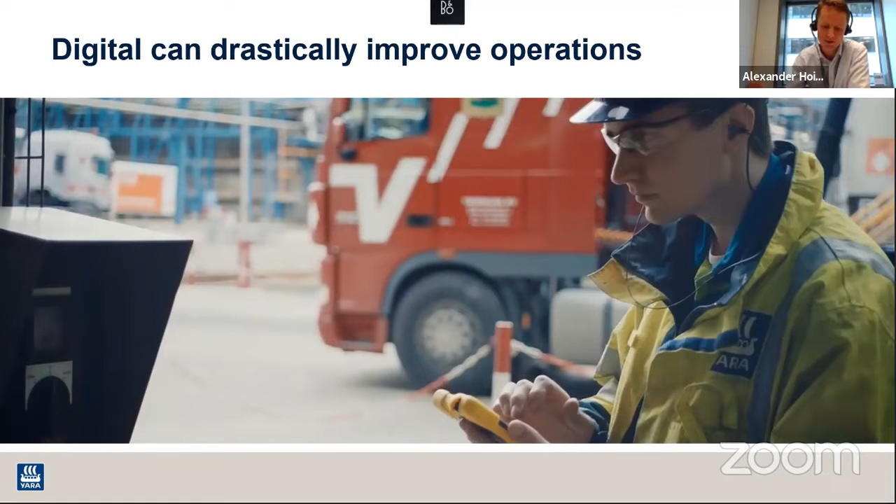So as any other major manufacturer, we are constantly chasing improvement opportunities. As a company, we've been on a lean journey now for some time. And as I mentioned at the very beginning, we really see digital as the next natural step on that improvement journey, where we see an opportunity for another drastic step change. If you saw that guy on the previous slide holding a tablet, it's not that hard to use a bit of imagination and see that there is a real improvement opportunity here.

From equipping our field operators with tablets versus the pen and paper that many of them still use today, also at our production sites. But when I say that there is a real and significant improvement opportunity, what does that really mean? For us in Yara, we see that there is at least $500 million up for the taking here in terms of value creation on an annual basis.

But the value in terms of the financials is only part of it. We also believe, as we will get back to, that there are significant improvement opportunities in our HESQ performance that we can realize through digital tools and applications. And not only that, there are also some softer benefits which maybe are not as explicit, but being seen as an attractive employer in the world of today also means that we need to invest in making sure that we equip our employees with the right tools and solutions.

So if we look at that opportunity, we think that it's simply too big to ignore. And frankly speaking, we believe that we have to go after that opportunity if we want to stay competitive. And as a basis of that, we have established a clear vision as a company.

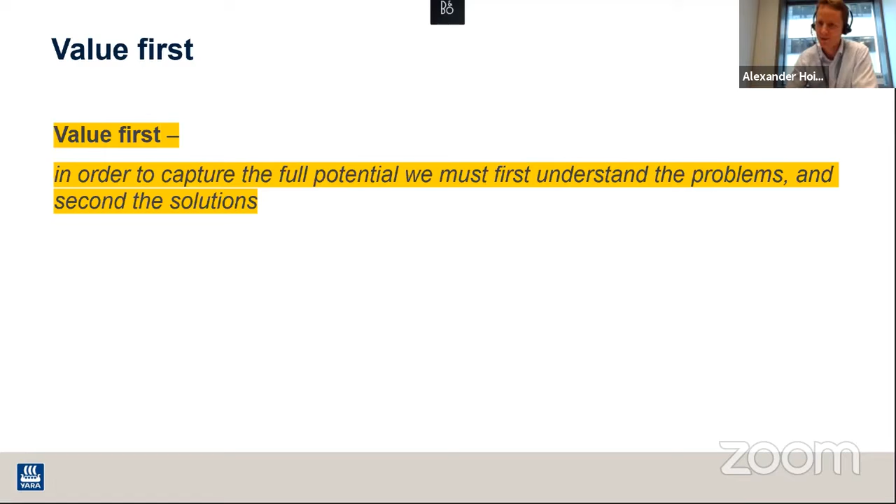I'll hand over now to Aurélien, there are plenty of opportunities to do this, plenty of real problems to go after. I will hand over to Aurélien, who will give us some concrete examples from the Yara Tertre perspective. So Aurélien, I'll hand over the word to you.

Thank you, Alexander. So the main goal here is to present a brief overview of different digital application examples developed at the Yara Tertre site in Belgium. The journey actually started back in 2014, with the support of the digital production department or by direct site initiative. I will try to share how these 4.0 digital initiatives align with our corporate process safety risk management overview and overall productivity maintenance governance ambitions.

But first, a few words about the Yara Tertre site. Yara Tertre is a high-level Seveso site, founded in 1928, employing around 270 workers and 100 subcontractors. Its annual production capacity reaches around 900,000 tons of nitrogen fertilizer. So it's a kind of medium site, I would say, on the Yara corporate overview.

Nitrogen fertilizer is the final product, but we also produce some secondary chemical products that are valuable for the plant. This site represents 3% of the turnover volume of the Walloon chemical sector here in Belgium. Natural gas represents 70% of our production costs. The ammonia plant facility, with a power of 550 megawatts, consumes almost 2% of the total natural gas consumption in Belgium. This means that 15% of primary energy consumed in Wallonia is dedicated to Yara Tertre.

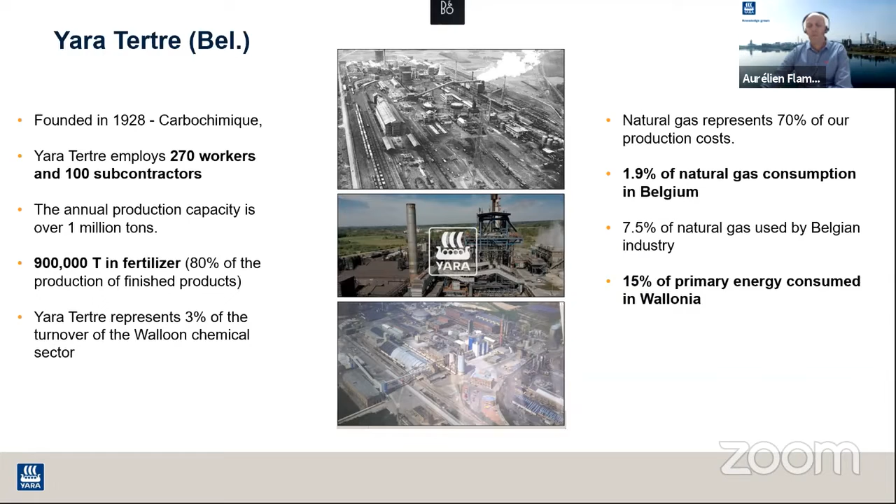The process safety management system in Yara is built on 4 pillars and 20 elements, based on risk-based process safety as proposed in the CCPS governance, well known by specialists. This structure is a real guideline created and available through the Yara steering system, where all process safety policy is designed. You can find important elements like hazard identification and risk analysis.

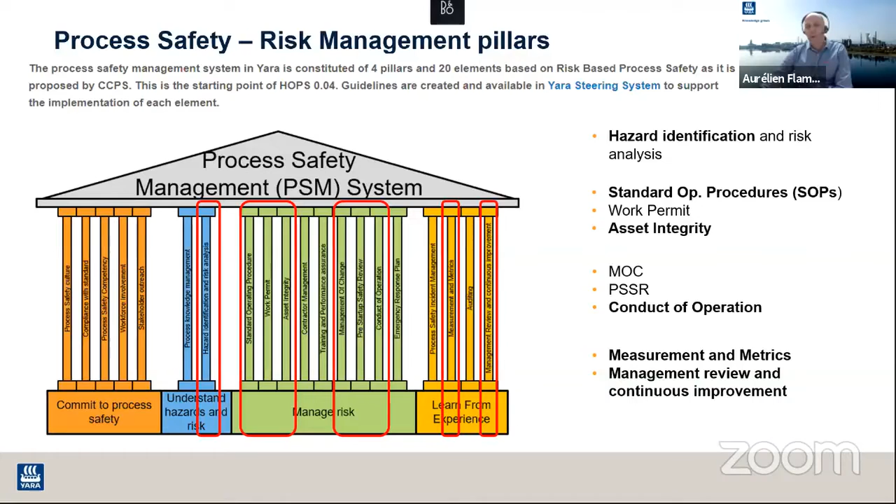Standard operating procedures and asset integrity, conduct of operations, measurement and metrics. The following slides will describe some 4.0 digital applications, just some of them, which directly or indirectly impact these constituent elements described here.

But let's go to practical examples. The first example here is an application designed in 2016 for our plant asset integrity operating windows and rotating machinery follow-up. Basically, Yara technical operational standards require the development and follow-up of an integrity operating window and rotating monitoring dedicated application, with reporting and meeting frequency requirements. The challenge is that there is no defined application provided or proposed. It's really up to the site to define it.

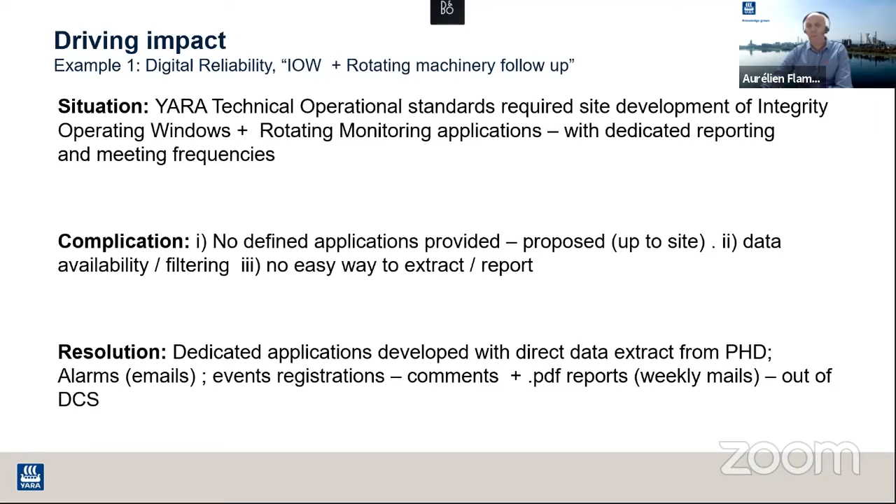Available data is quite raw, with no defined filtering, and reporting can be an issue as well. So we defined a new digital application extracting direct process data from PHD, with adapted alarm events registration and a dedicated automatic PDF report. Here are some screenshots from the rotating machinery follow-up application, where you can design follow-up easily and automatically for different rotating parameters.

With the possibility of timelining and trending. For the integrity operating window application, here you can see different ranges and types of alarms designed for different types of critical assets, with automatic email alerts defined for dedicated types of users, like production, maintenance, or NDT department. So everyone is aware at the same time about out-of-range conditions for major equipment, which can afterwards adapt the different inspection methodology foreseen during a turnaround.

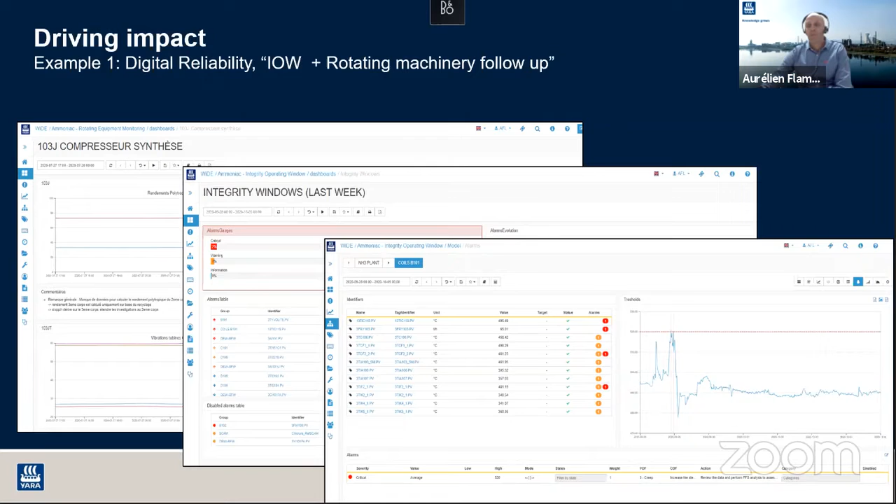For dedicated parameters, you have the possibility to go through each one and describe exactly the deviation observed, and register it through the digital application. This application, designed here by the software company YDTech, a Belgian company, is completely user-friendly and can be tuned by process specialists or dedicated technical departments.

In 2017, we decided to modernize our process trending system. Optimal operations require being data-driven for any decision-making and root cause problem solving. So we had a large data historian, as a big manufacturing site, but with poor trending and analytics capabilities. So it was decided to introduce a self-service analytics tool to our operation facility. This tool is connected to multiple databases and ensures access to multiple trend analytics platforms.

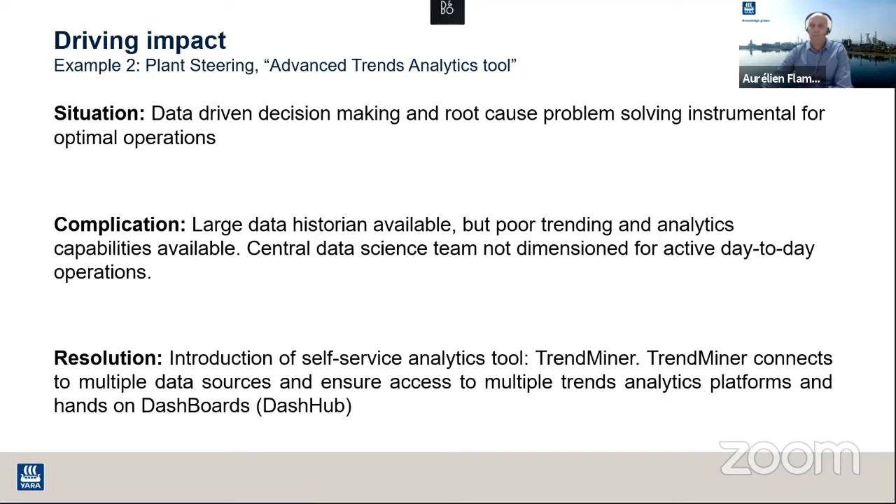This specific trending digital application, developed here by TrendMiner, is mainly used to identify events, analyze them, and propose deep analysis with associated root cause and/or process optimization. This tool ensures optimal operation by democratizing analytics.

We continue here with the plant steering dedicated application providing an energy plant load, which is important for the site, a big energy consumer, online with advanced analytics dedicated modeling. As mentioned, energy usage is the major cost component for an ammonia production facility, and this has a significant impact on profitability of the site.

But plant efficiency is erratic, following process knowledge, some instability, and external factors like outside temperature. Prior to this, having an internal reference for what good performance looks like was a real challenge and time-consuming. The solution was provided by introducing a web visual energy load curve with performance visuals, providing guidance to the operator.

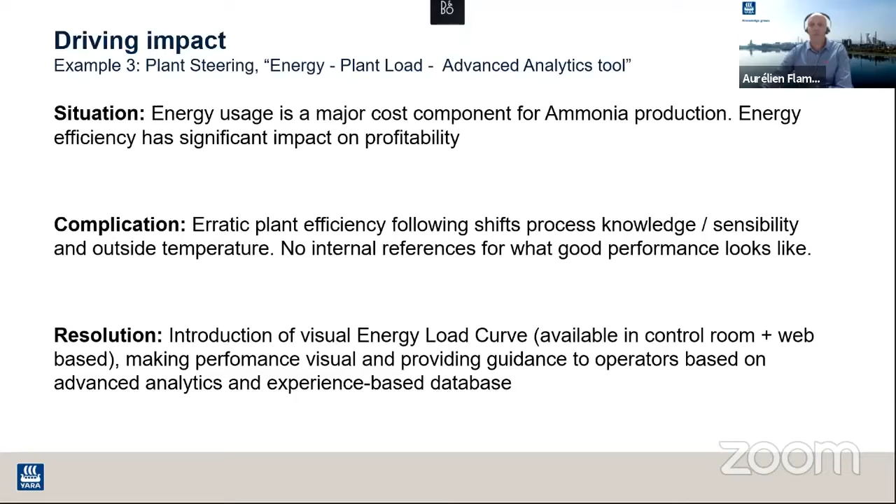So here is the online energy load curve developed with the software company Pepit. This screenshot describes what you can see: the theoretical load curve in red, and the actual position of the process compared to the curve, following the operational point.

This visual is also proposing actions to the operator through the advanced analytics modeling process behind it, in order to achieve the best demonstrated operating point. This digital application, commissioned in 2018, ensures a continuous improvement philosophy to the shift, completely in line with our lean model organization setup, which is ongoing, with an average energy saving already demonstrated of 0.15 gigajoule per ton produced.

Let's continue our digital journey with the commissioning in 2019 of an advanced process controller, APC. This APC was completely integrated into the distributed control system, DCS, at our ammonia plant facility. Normal dynamic process variation in plant operation means variation in specific energy, productivity, and risk of upset. This APC is interfacing with the DCS application as an independent system.

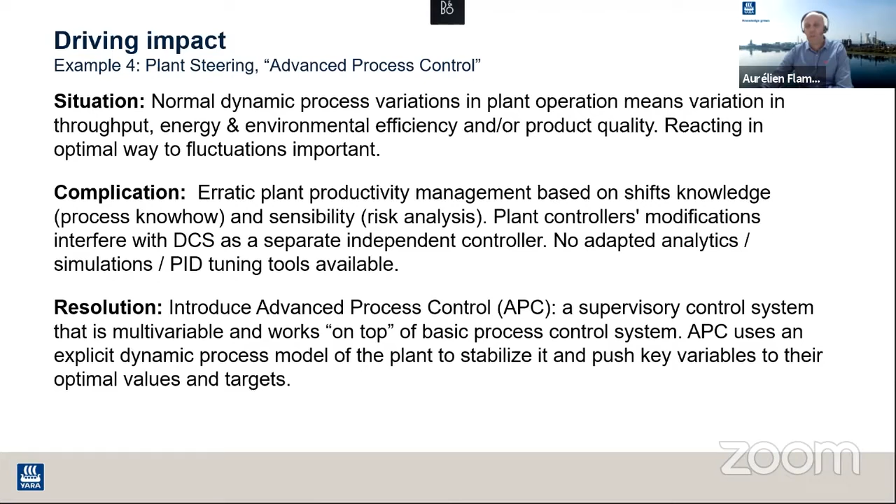After commissioning of the APC at the Yara ammonia plant, a first saving of 0.15 gigajoule per ton additional was observed, with extra daily productivity of around 20 tons per day. You can easily see the benefit of the APC on the operational curve of the plant, where the orange points are the operational points with the APC running. For the same production rates, the energy consumed is quite lower compared to the APC off. Looks promising, isn't it?

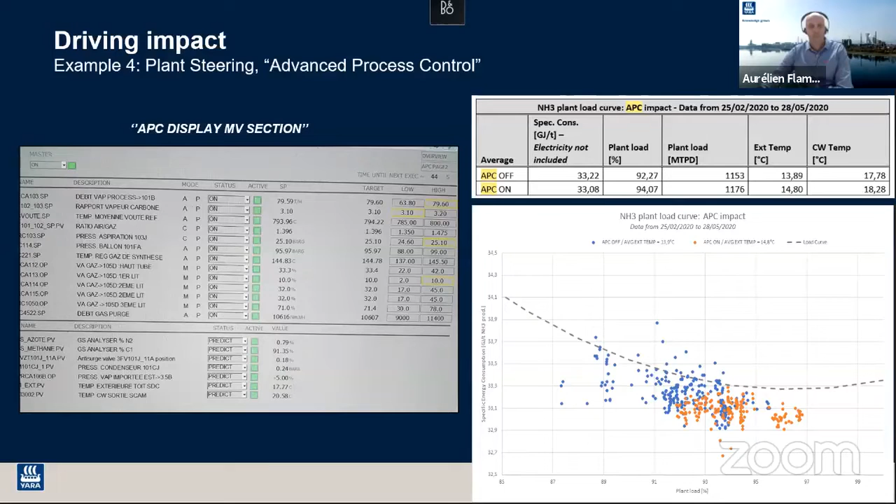A few months ago, we decided to launch a digital operation application dedicated to digital control rounds. At Yara plant facility, there are more than 100,000 control rounds executed every year to secure safe and reliable operation. But the process today is really paper-based, which is quite difficult to manage in terms of consistency, non-conformities, and insight observation over time.

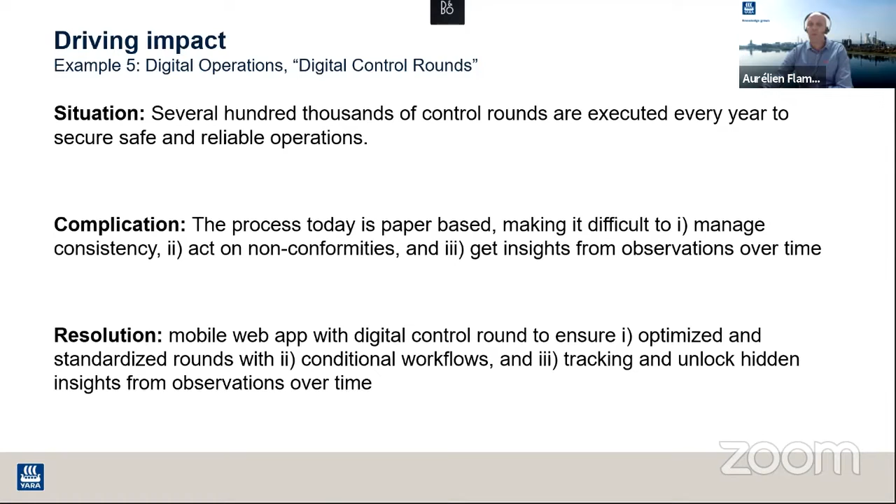The last application described here concerns digital operation with a dedicated maintenance execution application that we would like to launch in a few months at the Tertre site. With more than 1 million individual maintenance operations executed every year at our facility, the efficiency of these operations has a big impact on our ability to maintain and improve our assets.

There is a gap between work planning and execution resulting in waste. As I already mentioned, we are completely on the lean journey where waste management is really important. This mobile application will ensure the right information for the technician and the ability to give live feedback on progress and deviation, enabling improved planning and execution for next time.

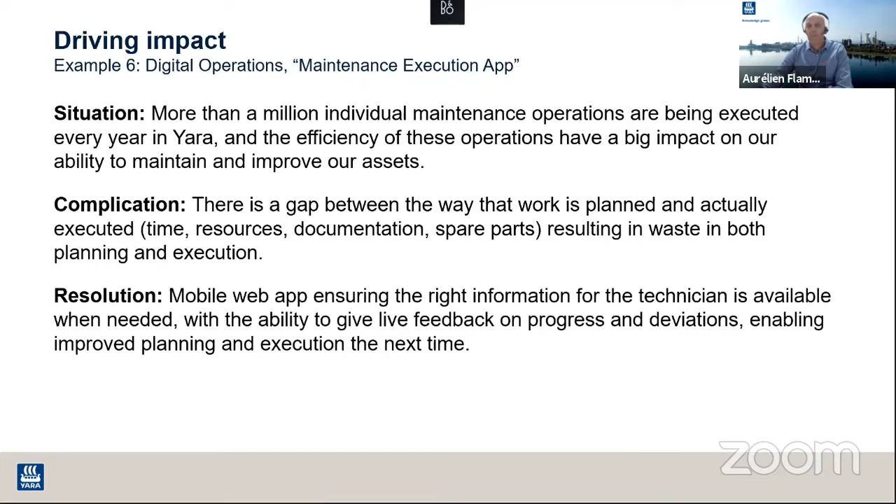But in Yara Tertre ammonia plants, from the OEE point of view, we were really heavily impacted by a major equipment upset between 2016 and 2019.

With the new equipment online right now, we are demonstrating an improved OEE performance trend, with expected stability promoted by the digital application developed and ongoing, ensuring we avoid recurring loss or unscheduled downtime.

The message which is really important here is that you don't have to wait to be best in class to develop an application. You can already start the journey, even if your plant is not performing as expected. It's perhaps an opportunity to make some developments, some tests, in order to ensure that when you are ready to be back online and back to best performer, you're already ready to use this application, starting prior to that.

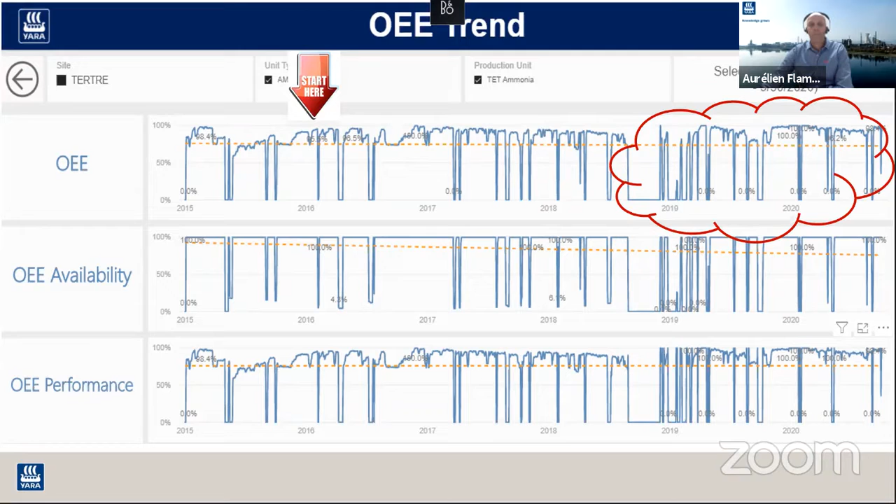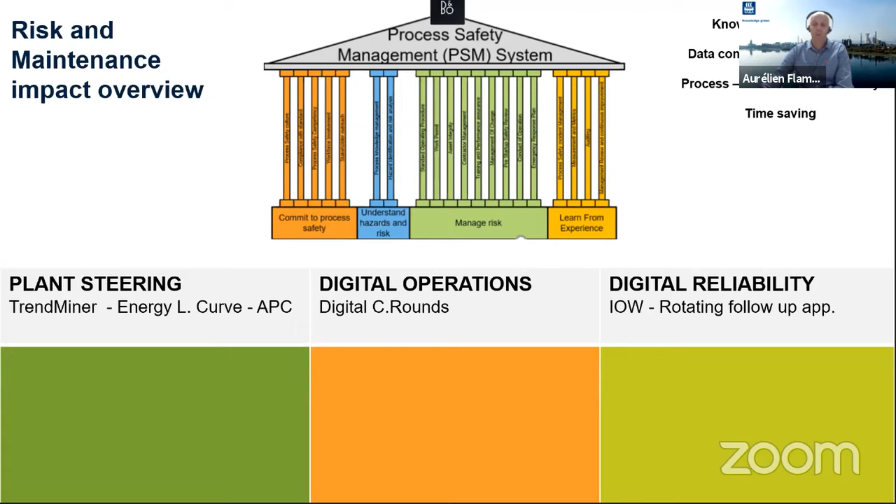By the way, coming back to the risk and maintenance impact overview, we can classify the risk pillar elements for different digital production initiative categories, with the hazard identification and risk analysis covered for all applications demonstrated today.

The standard operating procedure is covered by the digital control rounds, for instance, and in line with our lean organization setup ongoing.

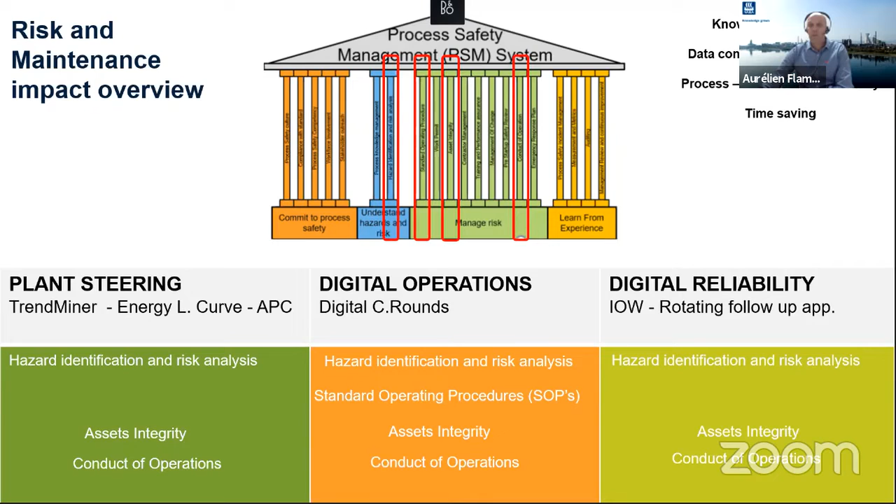The asset integrity and conduct of operation are covered as well by all the applications demonstrated today, and the list is not exhaustive.

Measurement and metrics are also covered by the different plant steering and digital reliability applications already in place.

But this direct process safety risk impact should not hide the indirect important impact that the digital application journey can bring to the production facility, like the know-how and the attractivity, which is really important.

We know right now that the millennials are there, they are on the market. If we have some difficulty to achieve and access some data, the millennials and the high potentials will leave the company as well.

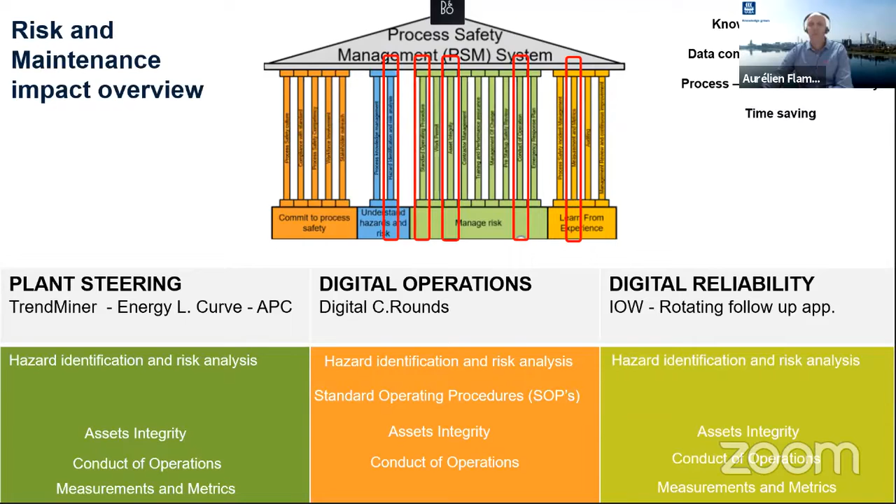So the attractivity of the tools, the facility of accessing the data, is really important as well for the talent development of the company: data consistency and accessibility, process and maintenance reactivity, and for sure, the overall time saving.

Many thanks for your attention, and we are ready for the Q&A.

Yes, hello, thank you very much also for your presentation. It was quite inspiring. We have some time left here to talk and go a little bit deeper into the many aspects that have been treated. So we have quite a few questions in the row here.

So a first general question, I think related to the first application of the digital journey: on which platform, because we saw a kind of Yara platform, but what type of platform is behind that? Is it Amazon or is it any other platform? Can you talk a little bit more about the architecture behind it?

Yes, I can, absolutely. So on the overall platform side, we are currently working on an Azure-based, so Microsoft Azure-based, cloud platform, which we call our DPP, our Digital Production Platform version 1.0. We're also right now in the middle of a setup where we are piloting some other technologies, looking into AWS at the moment, which may also mean a shift, but that is the current setup.

Okay, so are you running that as a private cloud? How do you manage security issues, because that's also a risk, isn't it? How do you manage data security?

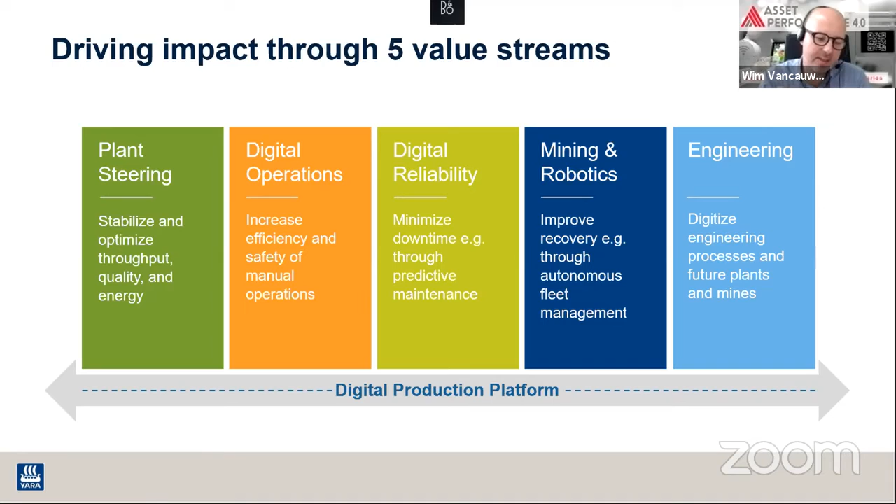You had a very interesting slide stating we have data science for non data scientists. Can you revert back to that slide and explain a little bit what you mean by that? Who are the non-data scientists, and why can they use this and not something else?

Actually, this application developed with TrendMiner is a trending tool which can be used in a normal manner, but where you have a lot of dedicated applications inside where you can do some data mining. The data mining is a specialty by itself - not something the chemical engineer or maintenance engineer is really aware of. It's something quite fresh, quite new, and that you need dedicated tools for from time to time to launch and be in it when available.

And here there is definitely an opportunity to introduce this data mining system through the homemade engineers here. It's not really complicated, not something going to the sky. It's just an application available with widgets that you can apply and push the system with, in order to propose interesting filtering, data comparison, and sometimes dedicated main parameters which influence the behavior of your plant. So when you have a tremendous upset coming, with some tuning you can define what are the main parameters influencing your process. Without data mining application, or without big knowledge on it, this can be a challenge.

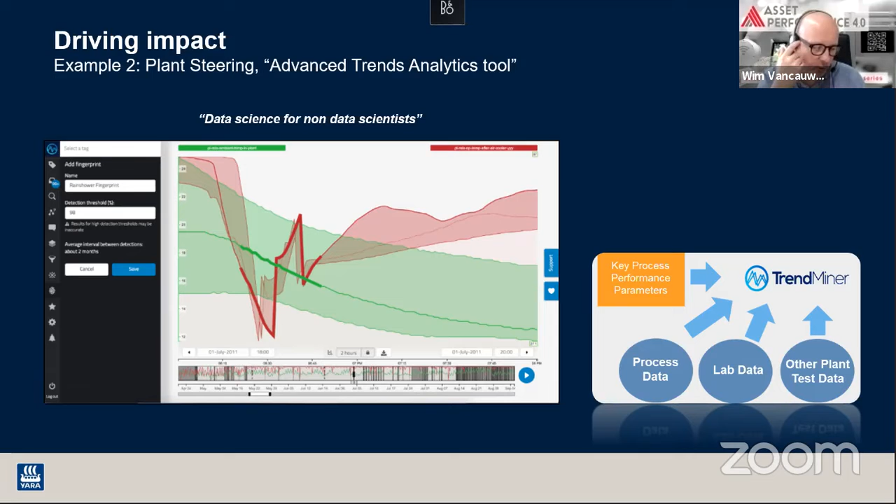Okay, interesting. So if I'm not mistaken, the next one was on the energy load curve. Is that correct? Yes. So a question here. I can imagine that the advanced process control says you need to adapt the parameters in this way, and on the other hand, you have the energy load curve telling the operator to adapt the parameters in another way. So the question is, can both systems contradict at some points? And then what does the operator do?

That's a really good question, Wim. To be honest, we discussed about it. This application was developed prior to the APC, and when the APC rollout was coming, I was putting exactly the same question as you. At the end, with the rollout responsible, it was clearly an advantage to have this kind of tool available in parallel of the APC, because the APC will tune the plant, but it will tune it as it should be, as it's commissioned. It will not influence the parameters of the plant over time.

So having this kind of energy load curve in parallel is always challenging the APC application. If we are not in line with the APC after a certain moment, we can challenge the parameters of the APC, because comparing the theoretical curve and the practical curve, we have a gap, and this gap should be covered by the APC application after tuning, describing what kind of parameter can be tuned due to the application developed by energy.

And so we have online here the energy load curve of the plant. You see the screen? Yeah, normally you should. Yes, we do see. That's it. Thank you. So what we can see is that we are nearly at the maximum demonstration rate of the plant, but I see that my operational point is really quite far from the theoretical curve.

And that's quite normal, because here we have some issue with some gas meters, and the theoretical curve was renewed a few weeks ago in line with the energy load curve. So right now, to reach this target is more difficult than at the commissioning of the application. That's why there's still a gap.

But anyhow, you can see that there is some parameter here which is described and which gives guidance to the operator to try to reach this point, because what this application is telling is: you have something to do, and you can achieve it, because with the same parameters, external temperature, controlled by the operator or not, you have already succeeded. So please try to do it.

And it's completely in line with the lean management system, where we try to develop applications where the operator and the shift leader can take decisions and not be held back by thinking, oh, it's the external weather, or it's normal, it's raining today. I don't know exactly what kind of excuse can be found, but there is always a good excuse not to push the plant to its maximum demonstration rate. But here that's not the case — we have already reached this kind of point under the same conditions.

So please, as a lean, you need to achieve it. And at the end of the shift, they can scale where they are compared, let's say, to the maximum best performance, because we have a gauge here which can easily describe to the guy, by my shift, I was performant or not. So this system is motivating the operators for shifting some settings and changing some settings in order to attain better energy performance.

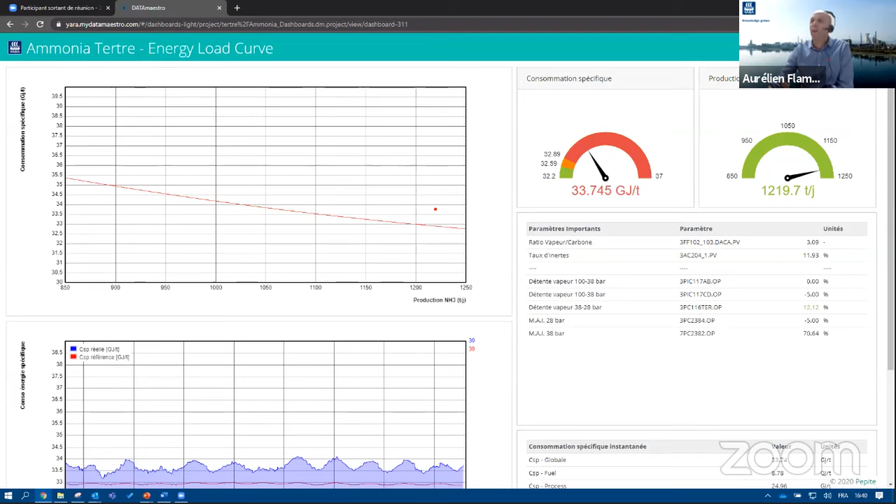Yeah, so this is a big motivator. Interesting. So this contradiction, it doesn't exist as we thought. Excuse me, I didn't... So that we started this topic with: is there a contradiction possible between the energy load curve and the APC?

But that is not the case, in fact. It's more a kind of dedicated online support which can fine-tune the APC time after time, because the APC is really turned about productivity. There is some new capture right now and some new tuning that we have developed with IPCOS about energy sensibility, but not as it should be. This parallel application gives us some guidance about the energy as well, which is, as already mentioned, quite an important factor here.

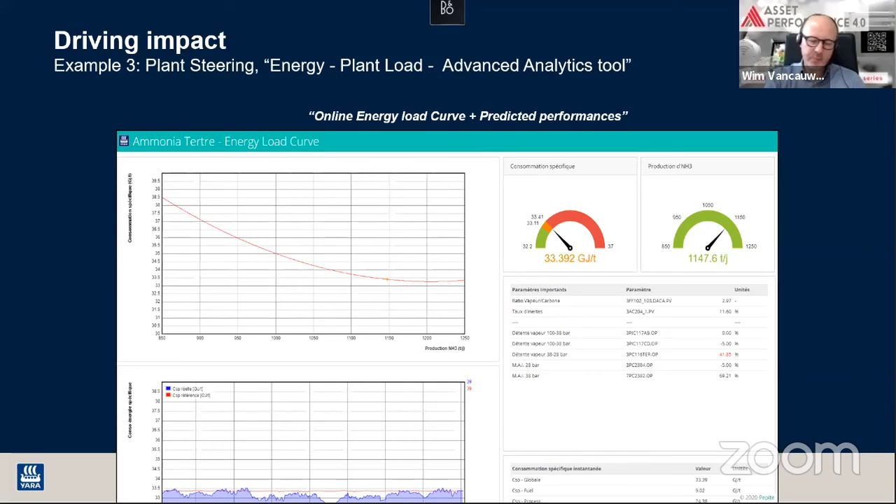A next question popping up on the screen is also related to some correlation. I think it was the next slide where you talked about these inspection rounds. So you have a system here - are those data collections immediately digitized and put into the ERP system, the CMS system, or are they put immediately also on the cloud?

Perhaps Alexander can confirm as well, but here the data is really extracted from the system and directly going to a kind of data pool and then re-extracted to the Power BI dedicated report. So you have not any connection between the data here available and the ERP. But the other application, which is here behind and ongoing to be developed on the site, will permit, during the run and the digital run performed by the operator, to also make some maintenance notification and to give some guidance to the maintenance department in order to resolve the deviance observed by the digital workers.

So you have this - those are the operator guys doing this digital rounds. I can imagine. And their input is put directly into the cloud. For the time being, that's the first step. But the second step will permit them to make a notification in case of deviance.

Is that visual data somehow connected back to the other systems like the APC or the energy load curve, because they have detected a kind of a meter setting, for instance, that is not digital for the moment, but thanks to the visual control, now you have a data point - is that taken into account? The two systems have not yet been connected to each other. But anyhow, here it permits the shift leader to have in real time what is the field process parameter and to take action in the control room when needed.

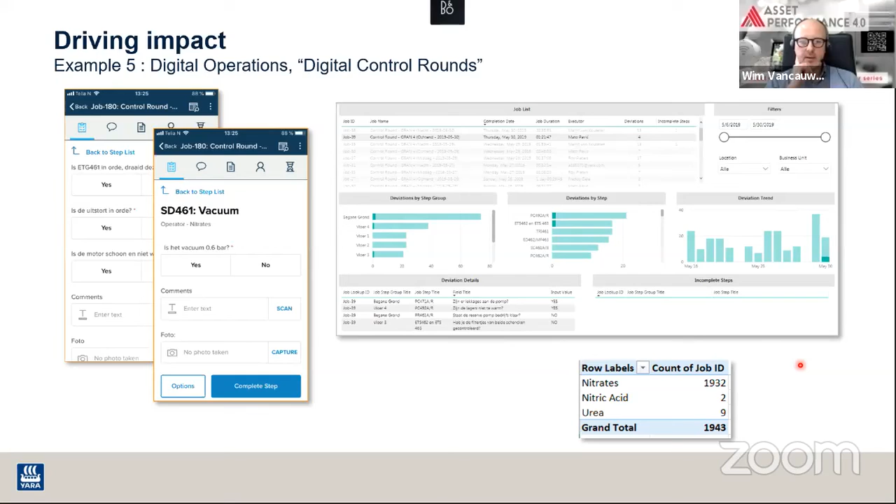Okay, so return on investment in terms of more reliability, more uptime - have you seen that already? And if yes, maybe you can elaborate a little bit.

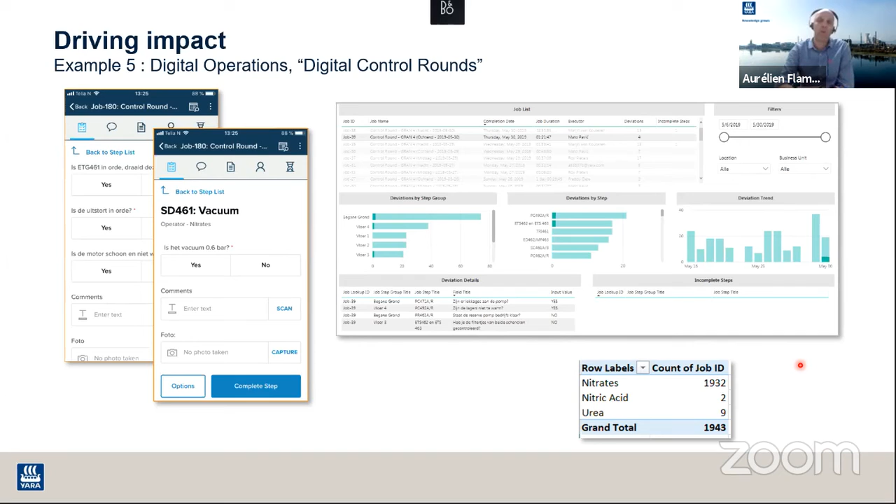I have a brief flash example which comes to my mind. We took the decision to stop the ammonia plants in May 2020 because we saw a defect failure on one of the machines, which was really going worse and worse. This is another application - it was on the rotating machinery application developed by YD Tech, which was discussed here.

So with the trending here, there was some vibration ongoing on the machine, which was giving us the impression that if it continued like that, we'd have a major outage of the machine coming. Without this application, the decision gate would for sure have been too late.

So here we decided to stop the ammonia plant, which was a cost-wise decision, but really less than having an unforeseen outage with all the tremendous timing issues that can occur with spare management, reparation, and restart of the plant afterwards.

You can imagine it's not - it's the kind of thing I have on my to-do list, to make a kind of business case of this saving due to the application alert. But to be honest, I have not yet done it. But this is the kind of thing we have done in the last months, and the decision was really guided by the rotating follow-up application described here.

You're touching on one of the big challenges of reliability, of course. How do you value something that hasn't happened? Because with this kind of application, what is really important is that you have a timeline possibility.

When you have a deviation of 1 micron, let's say every week, that's peanuts, 1 micron. But when you zoom out on the situation, you see that in 6 months you're passing through 60 microns to 70 microns, and the shutdown or outbreak will come at 80.